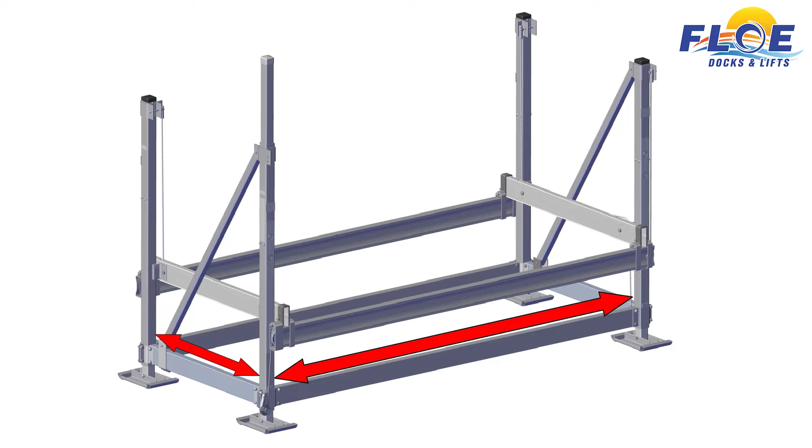Before tightening the fasteners, measure from corner to corner, then the distance between the corner posts above the frame beam and at the top of the corner posts, to ensure that your lift is square. Make sure your lift is level and square before installing the V-braces.

Assemble the cradle clamps with the given nuts and bolts before installing it onto the cradle beam. Use a marker to denote fasteners which have been tightened to the specified torque. In order to do the assembly, you will need the following tools.

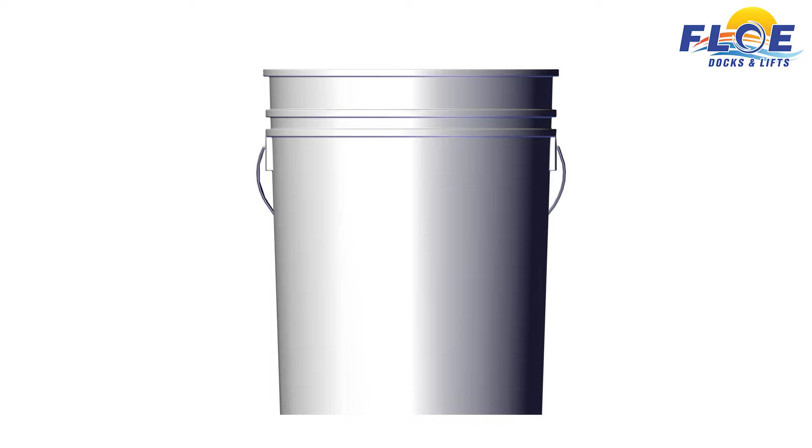The blocking material may be anything 10 to 15 inches in height. We recommend using 5-gallon buckets, jack stands, blocks, or sawhorses. You will need 2 for each side, or 4 in total. The blocking material is used to support the lift during the assembly in step 1 and 2.

Warning: do not use an impact wrench to adjust the easy level legs. Applying too much force to the easy level legs will damage the mechanism. Do not adjust any easy level leg more than 2 inches at one time. Alternate between all legs until your lift is level. If you do not adhere to these recommendations, it may result in poor lift performance and damage to lift components.

Do not use a corded drill to adjust the easy level legs. Use of a corded drill may cause electrocution.

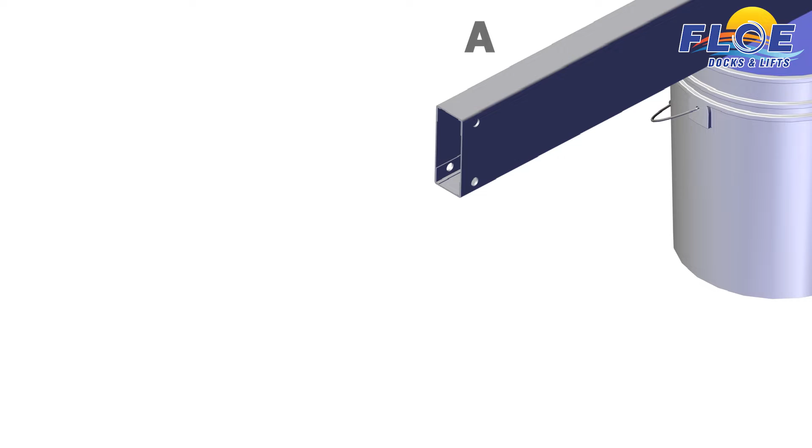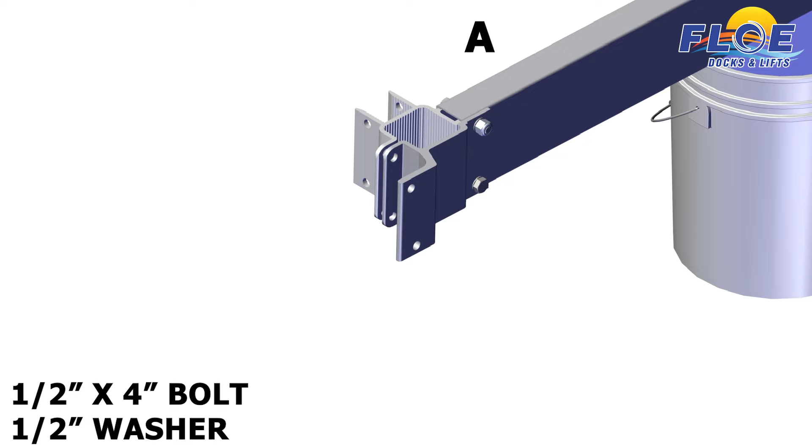Set the 121-inch lift beams onto your blocking material. On corner A, attach the inner frame clamp and the outer sheave frame clamp to the beam using a 1/2 by 3-inch bolt, 2 1/2-inch washers, and a 1/2-inch nylock nut. In the lower hole, attach the clamps using a 1/2 by 4-inch bolt and a 1/2-inch washer. Hand tighten the nuts only. Do not torque until all the nuts and bolts have been installed.

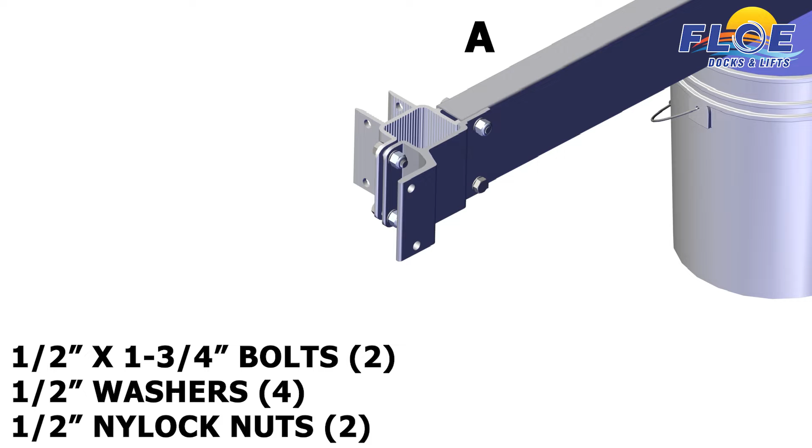Next, attach the inner frame clamp and the outer frame sheave clamp to each other, using 2 1/2 by 1 3/4-inch bolts, 4 1/2-inch washers, and 2 1/2-inch nylock nuts.

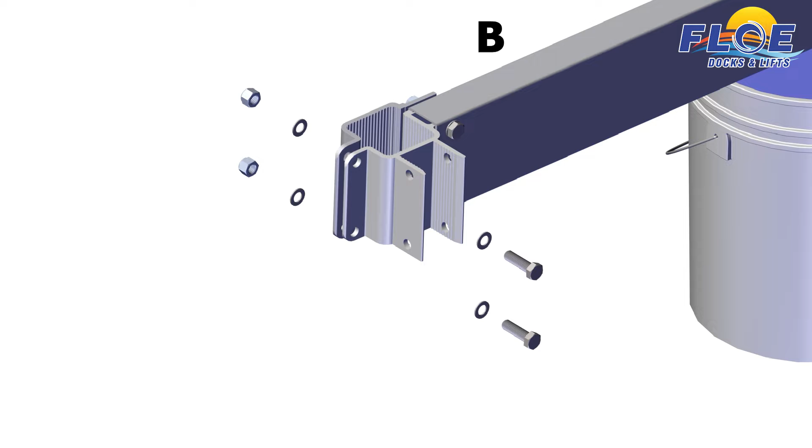On corner B, attach the inner frame clamp and the lower outer frame clamp to the beam, using 2 1/2 by 3-inch bolts, 4 1/2-inch washers, and 2 1/2-inch nylock nuts. Next, attach the inner frame clamp and the lower outer frame clamp to each other, using 2 1/2 by 1 3/4-inch bolts, 4 1/2-inch washers, and 2 1/2-inch nylock nuts.

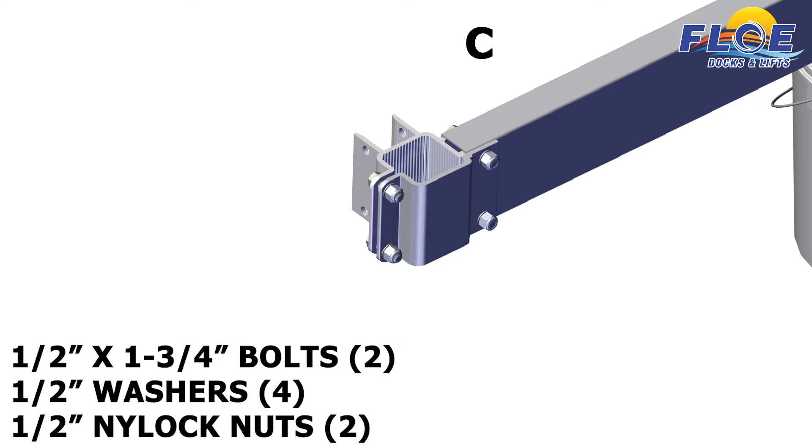On corner C, attach the inner frame clamp and the lower outer frame clamp to the beam, using 2 1/2 by 3-inch bolts, 4 1/2-inch washers, and 2 1/2-inch nylock nuts. Next, attach the inner frame clamp and the lower outer frame clamp to each other, using 2 1/2 by 1 3/4-inch bolts, 4 1/2-inch washers, and 2 1/2-inch nylock nuts.

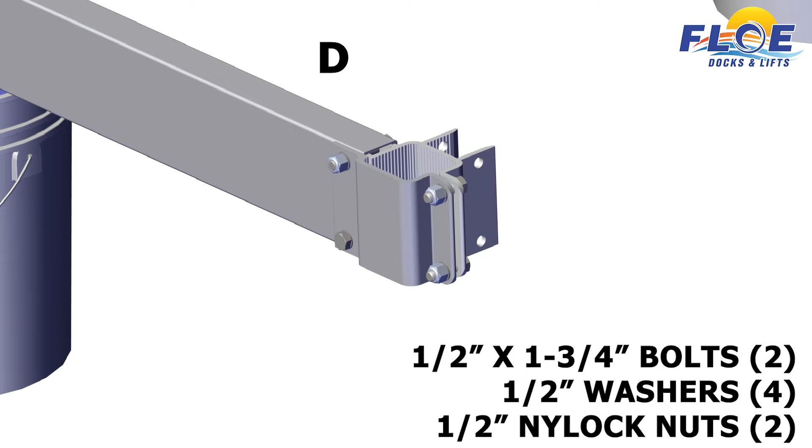On corner D, attach the inner frame clamp and the lower outer frame clamp to the beam, using a 1/2 by 3-inch bolt, 2 1/2-inch washers, and a 1/2-inch nylock nut. In the lower hole, attach the clamps, using a 1/2 by 4-inch bolt and a 1/2-inch washer. Next, attach the inner frame clamp and the lower outer frame clamp to each other, using 2 1/2 by 1 3/4-inch bolts, 4 1/2-inch washers, and 2 1/2-inch nylock nuts.

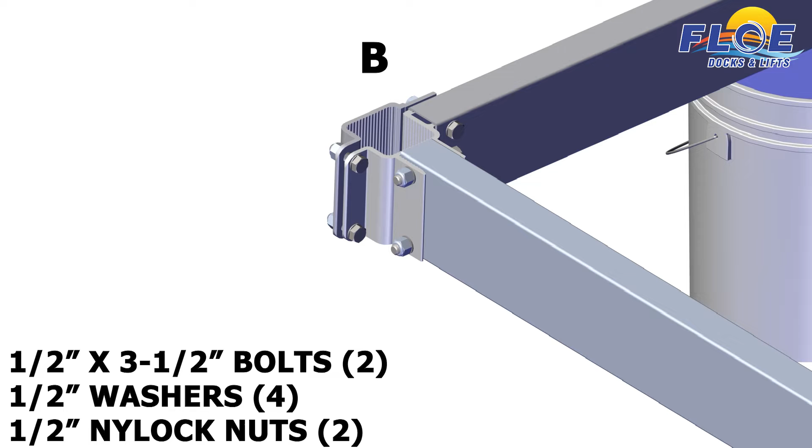Now, attach the 48-inch side frame beams. On corner B, use 2 1/2 by 3 1/2-inch bolts, 4 1/2-inch washers, and 2 1/2-inch nylock nuts. Make sure that the bolt heads are facing towards the inside of the lift, as shown. Repeat this same process on corners C and D.

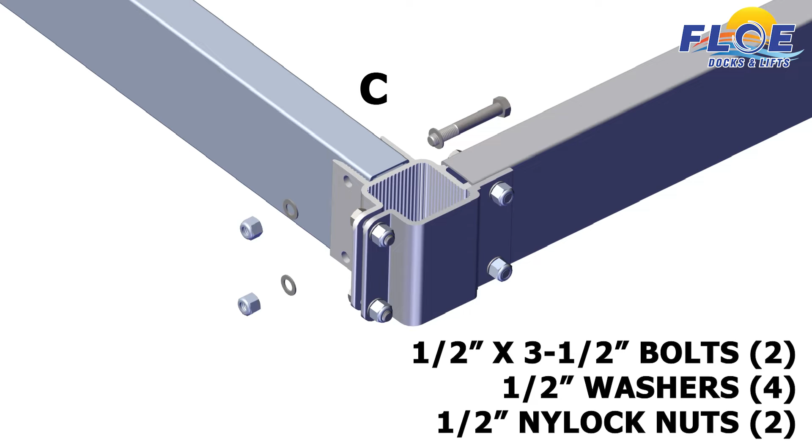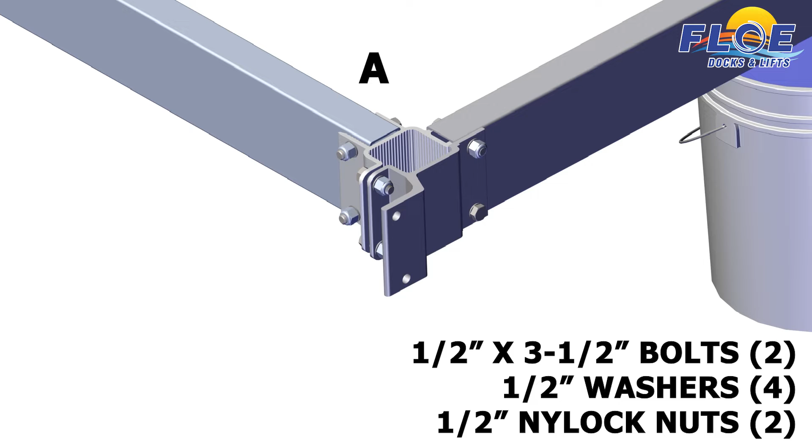On corner A, use two 1/2 by 3 1/2-inch bolts, four 1/2-inch washers, and two 1/2-inch nylock nuts. Make sure that the bolt heads are facing towards the inside of the lift, as shown. The frame beams must be in this orientation before continuing.

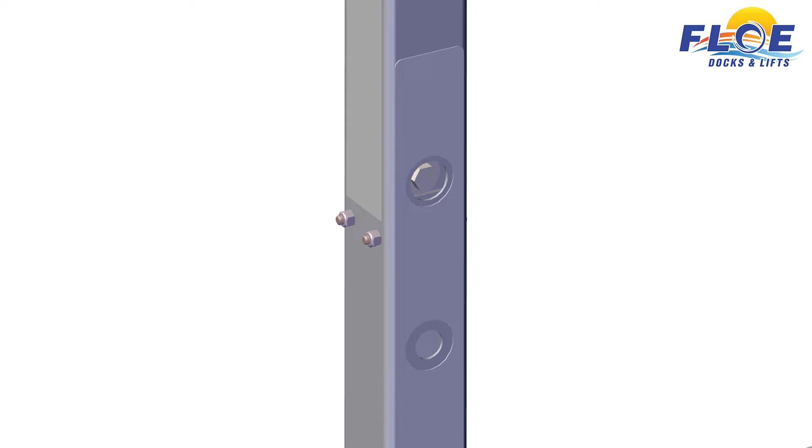Next, locate the corner posts. Slide the corner posts into their corresponding corner. The carriage bolt heads must face the inside of the lift, and the nuts must face the outside of the lift. The water depth stickers and drive bolts must face out on the front and rear of the lift. Make sure to butt the clamp up to the corner post tabs.

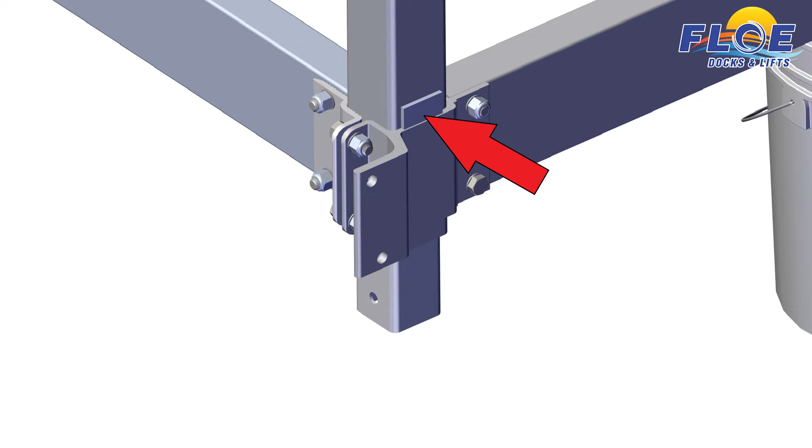Attach the sand pads to the bottom of the posts using a 1/2 inch by 3 3/4 inch bolt and a 1/2 inch nylock nut. Torque to 25 foot-pounds. Use the drive bolts in your drill to adjust the height of the legs. Check to make sure the frame is square before any bolts are torqued.

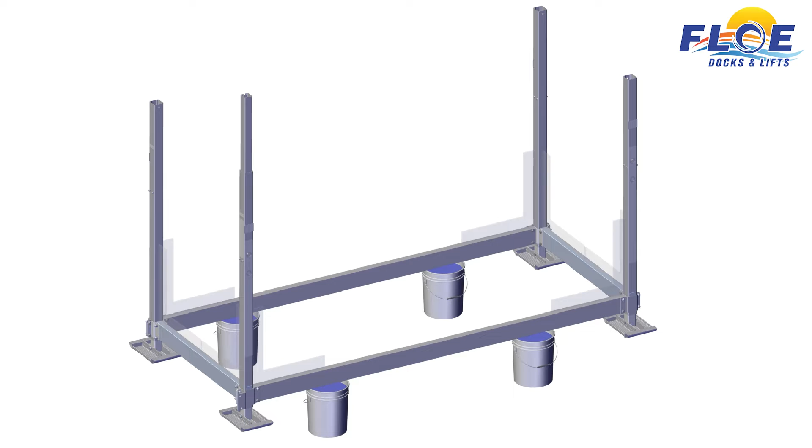The frame beam clamps must be tightened in the proper sequence. If the bolts are not tightened in the correct sequence, the frame beam clamps will be seated poorly. This may result in poor lift performance and damage to lift components.

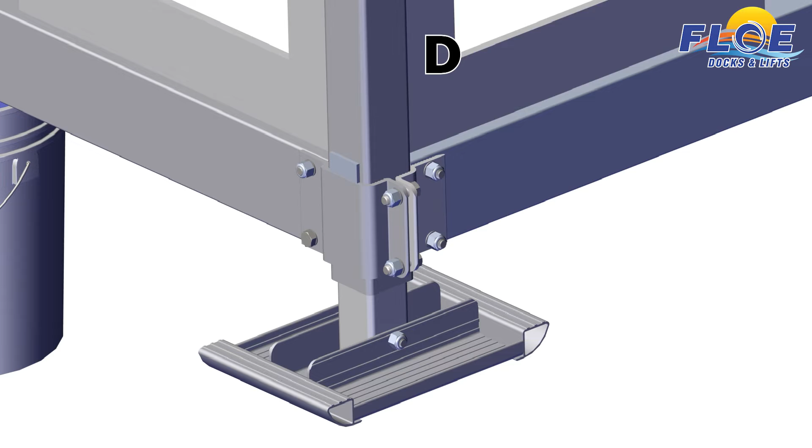Start with corner D. First, make sure that the corner is square. Then, torque the highlighted bolt to 60 foot-pounds. The lower bolt is not torqued until later. Then, torque the highlighted bolts to 45 foot-pounds. Finally, torque the highlighted bolts to 45 foot-pounds.

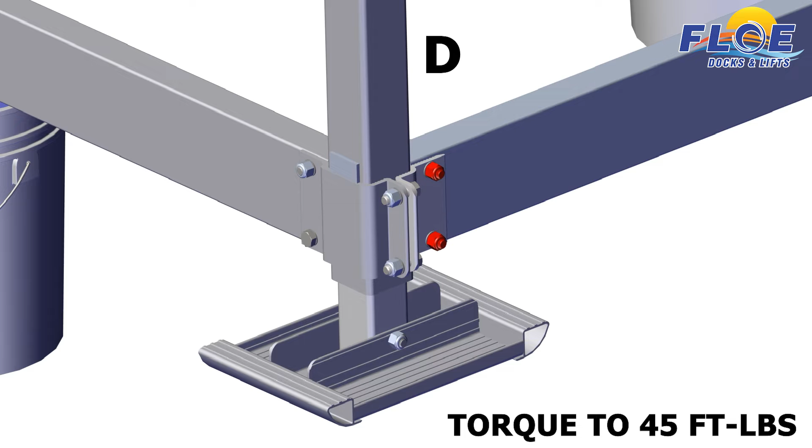Next, move to corner A. First, make sure that the corner is square. Then, torque the highlighted bolt to 60 foot-pounds. The lower bolt is not torqued until later. Then, torque the highlighted bolts to 45 foot-pounds. Finally, torque the highlighted bolts to 45 foot-pounds.

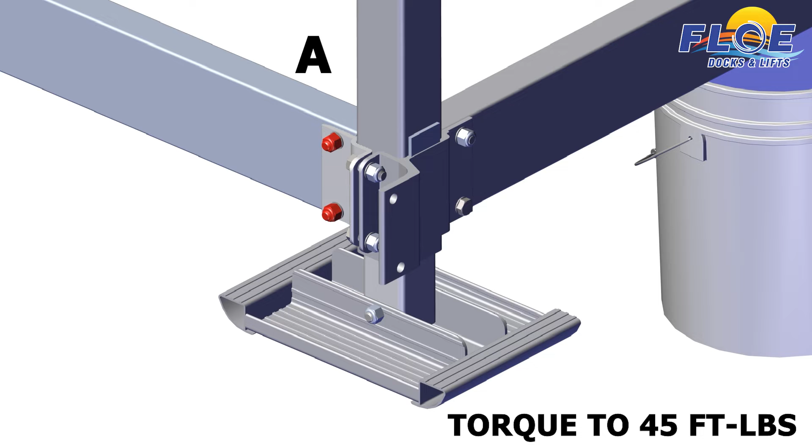Then, move to corner C. First, make sure that the corner is square. Then, torque the highlighted bolts to 60 foot-pounds. Then, torque the highlighted bolts to 45 foot-pounds. Finally, torque the highlighted bolts to 45 foot-pounds.

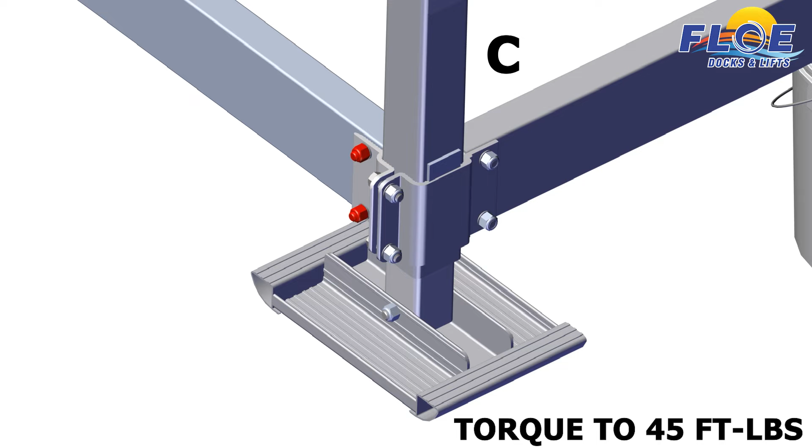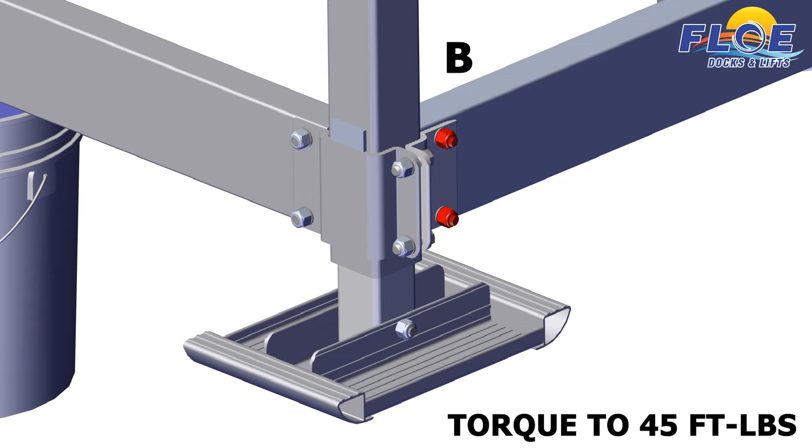Now, move to corner B. First, make sure that the corner is square. Then, torque the highlighted bolts to 60 foot-pounds. Then, torque the highlighted bolts to 45 foot-pounds. Finally, torque the highlighted bolts to 45 foot-pounds. You may now remove the blocking material.

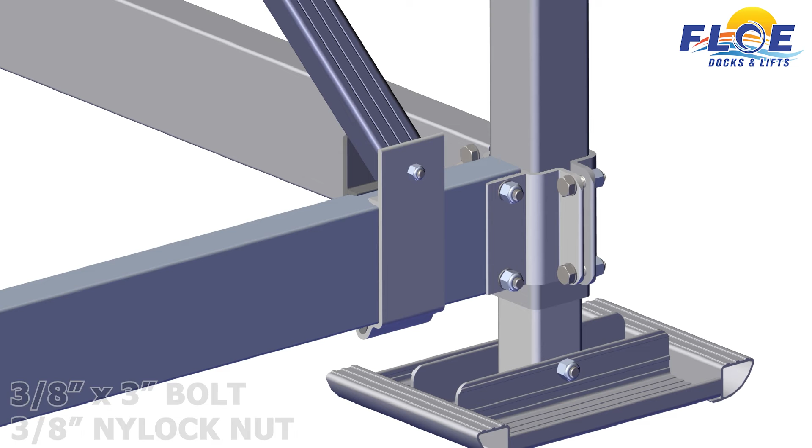Next, slide the V-brace clamps onto the frame between corners C and D. Ensure that the female V-brace clamp is on the inside of the lift. Attach the V-brace to the clamps using a 3/8 by 3 inch bolt and a 3/8 inch nylock nut. Hand tighten only. Do not torque.

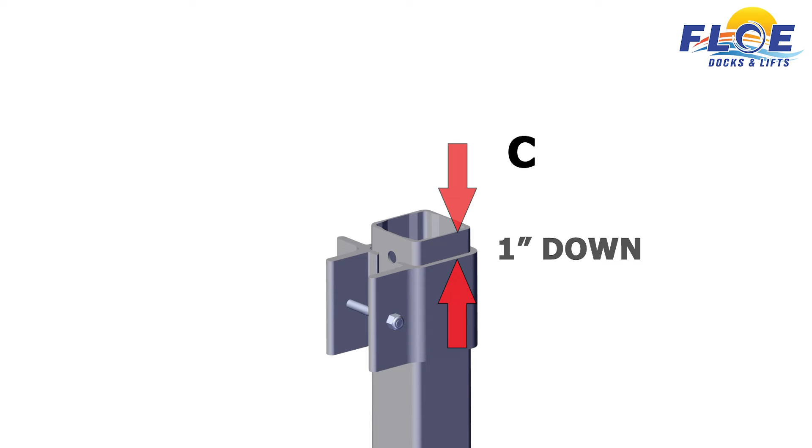Slide the 4-inch upper V-brace bracket onto corner post C. Attach using a 3/8 by 3.5 inch bolt and a 3/8 inch nylock nut. Ensure that the top of the bracket is at least 1 inch down from the top of the corner post. Hand tighten only. Do not torque.

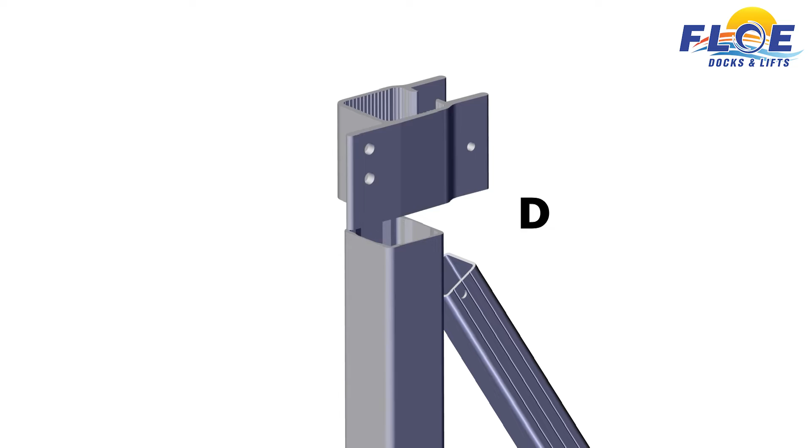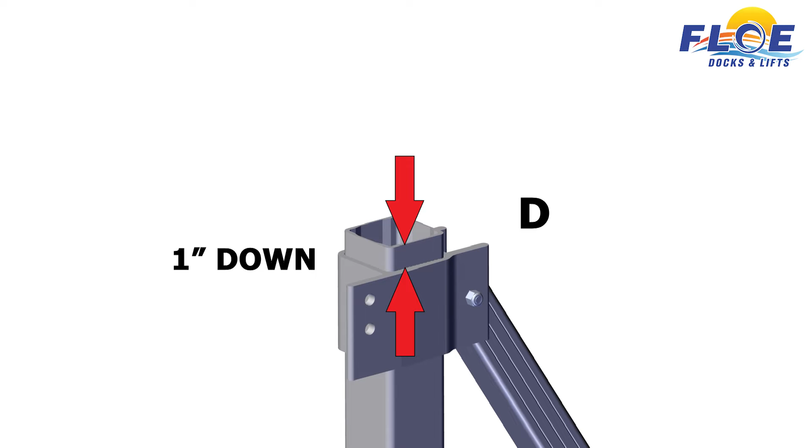Next, slide the upper lifting V-brace bracket onto corner post D. Attach the other end of the V-brace to the bracket using a 3/8 by 3.5 inch bolt and a 3/8 inch nylock nut. Ensure that the top of the bracket is at least 1 inch down from the top of the corner post. Hand tighten only. Do not torque.

Ensure that the corner posts are square. Now you may torque the bolts. First, torque the highlighted bolt to 35 foot-pounds. Now, torque the upper bolts to 35 foot-pounds.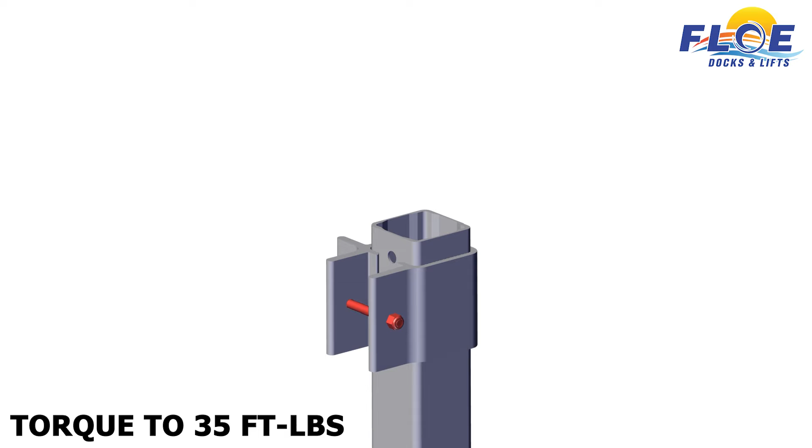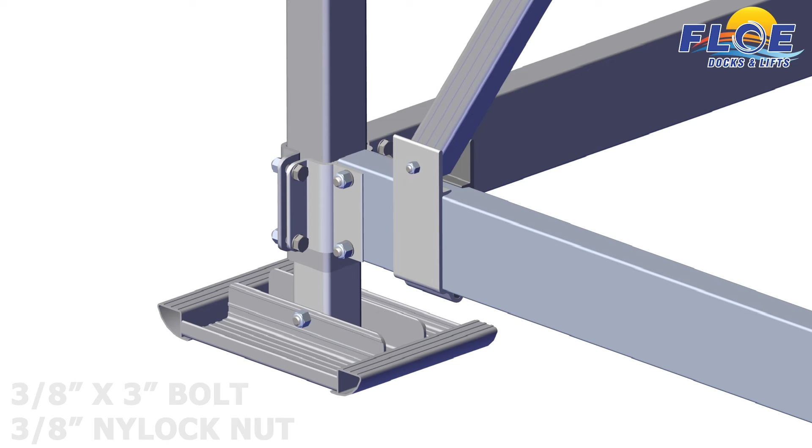Next, slide the V-brace clamps onto the frame between corners A and B. Ensure that the female V-brace clamp is on the inside of the lift. Attach the V-brace to the clamps using a 3/8 by 3 inch bolt and a 3/8 inch nylock nut. Hand tighten only. Do not torque.

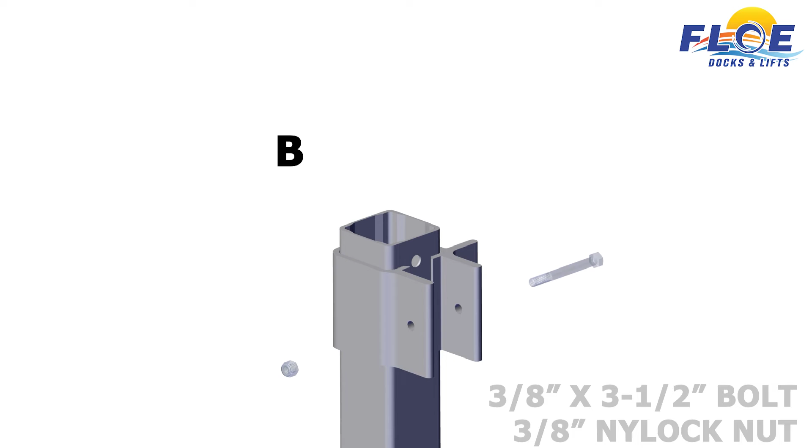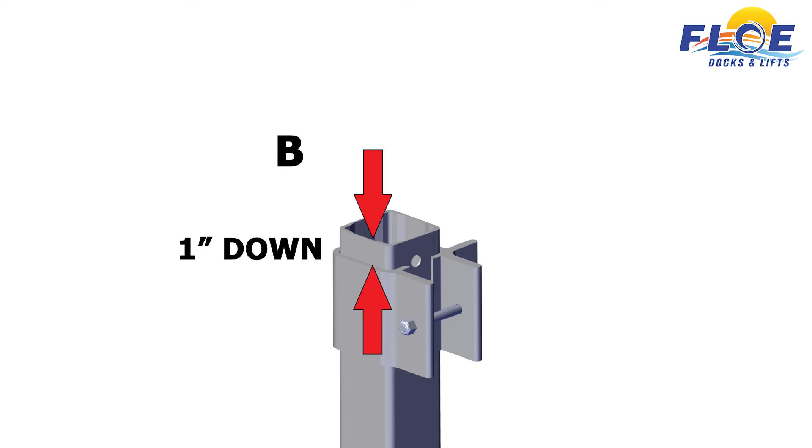Next, slide the 4-inch upper V-brace bracket onto corner post B. Attach using a 3/8 by 3.5 inch bolt and a 3/8 inch nylock nut. Ensure that the top of the bracket is at least 1 inch down from the top of the corner post. Hand tighten only. Do not torque.

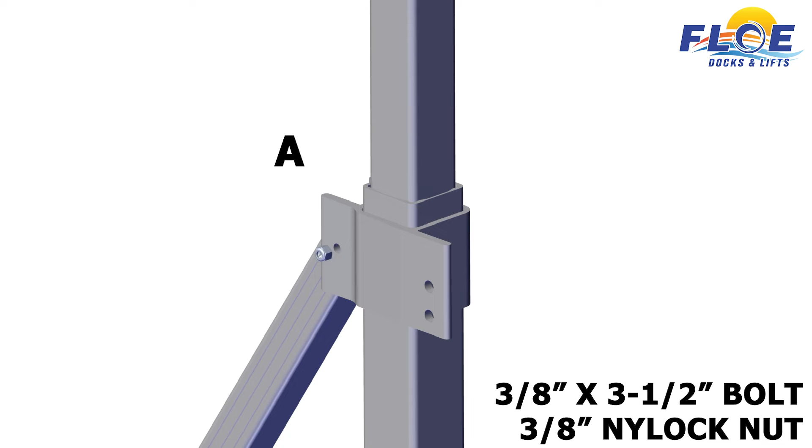Slide the upper lifting V-brace bracket onto corner post A. Attach the other end of the V-brace to the bracket using a 3/8 by 3.5 inch bolt and a 3/8 inch nylock nut. Ensure that the top of the bracket is at least 1 inch down from the top of the corner post. Hand tighten only. Do not torque.

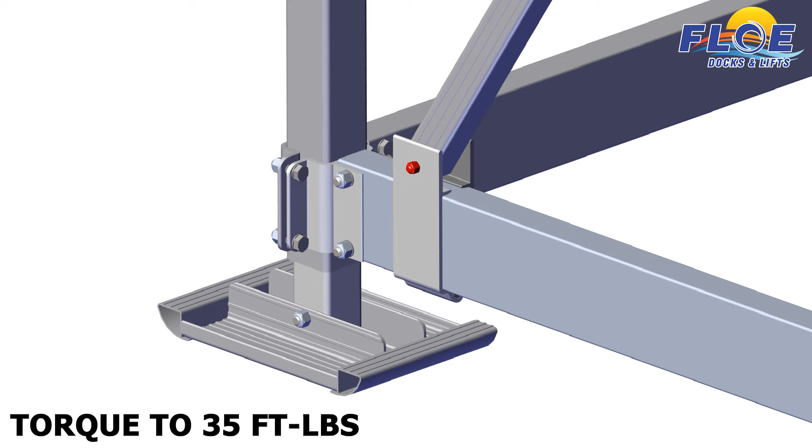Ensure that the corner posts are square. Now you may torque the bolts. First, torque the highlighted bolt to 35 foot-pounds. Now, torque the upper bolt to 35 foot-pounds.

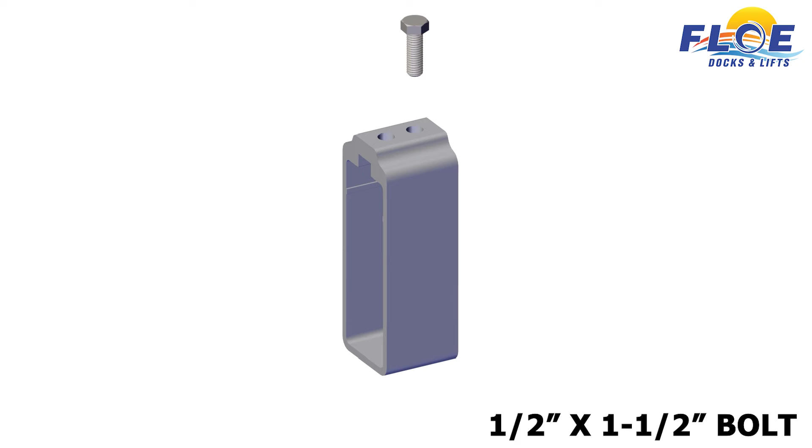Next, locate the cradle lift clamp. Slide a 1/2 inch nut into the cradle clamp. Thread a 1/2 inch by 1.5 inch bolt into the clamp and nut, just until the bolt catches the nut. Do not tighten.

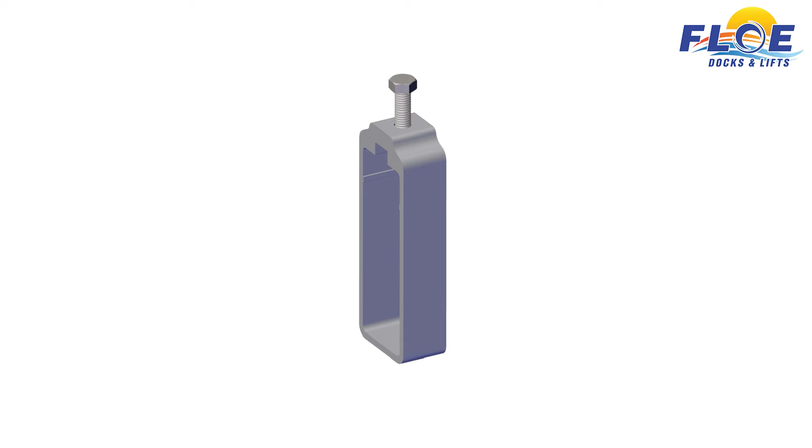On the other 7 cradle clamps, slide a 1/2 inch nut into the cradle clamp. Thread a 1/2 inch by 1.5 inch bolt into the clamp and nut, just until the bolt catches the nut. Do not tighten. Place the right side cradle beam so that it aligns with corner posts A and B.

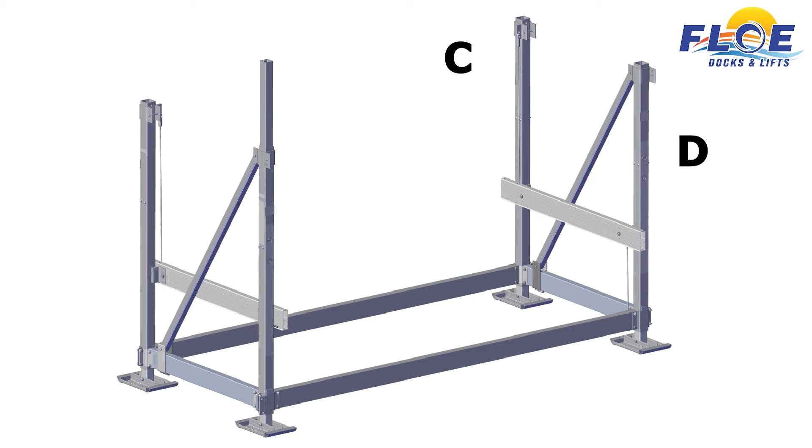The upward leveling cable is placed on corner B, and the downward leveling cable is placed on corner A. Place the left side cradle beam so that it aligns with corner posts C and D. The upward leveling cable is placed on corner C, and the downward leveling cable is placed on corner D.

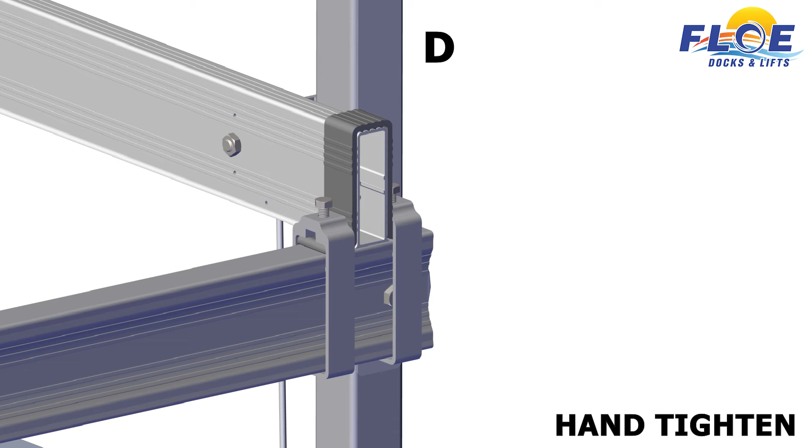On corner D, take the end cradle and slide 2 cradle clamps onto the beam. Then, place the cradle U-clamp on top of the end cradle. Slide the cradle clamps over top of the cradle U-clamp. Hand tighten the bolts to hold everything in place. Do not torque.

On the other side of the cradle beam, corner A, slide 1 cradle clamp onto the beam, followed by the cradle lift clamp. Place the cradle U-clamp on top of the end cradle. Slide the cradle clamp over top of the cradle U-clamp.

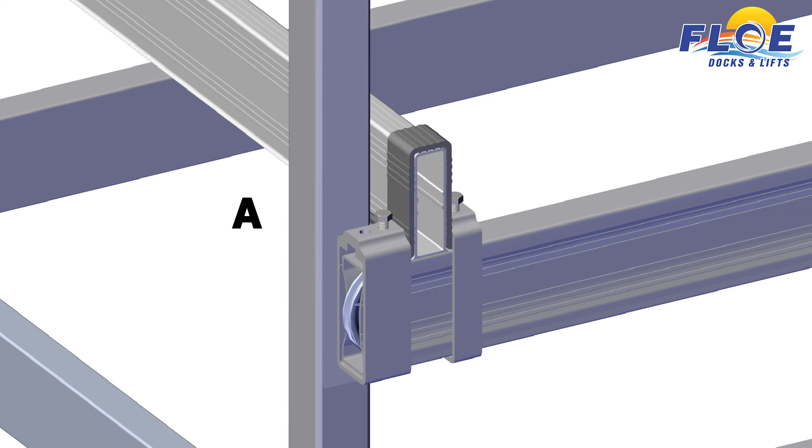On beam B, take the end cradle and slide 2 cradle clamps onto the beam. Place the cradle U-clamp on top of the end cradle. Slide the cradle clamps over top of the cradle U-clamp. Repeat on the other side.

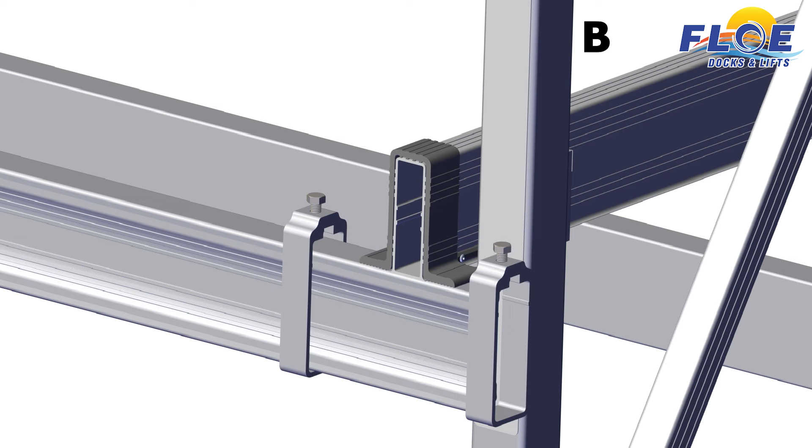Make sure that there is a 1/4 inch gap between the UHMW strip and all of the corner posts. Ensure that the surface of the end cradles is flush with the surface of the U-clamp. On beam B, the cradle clamp should be the same distance from the end on both sides.

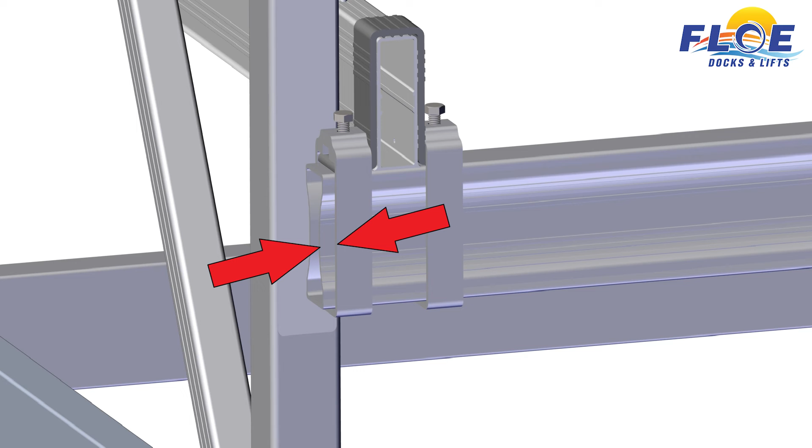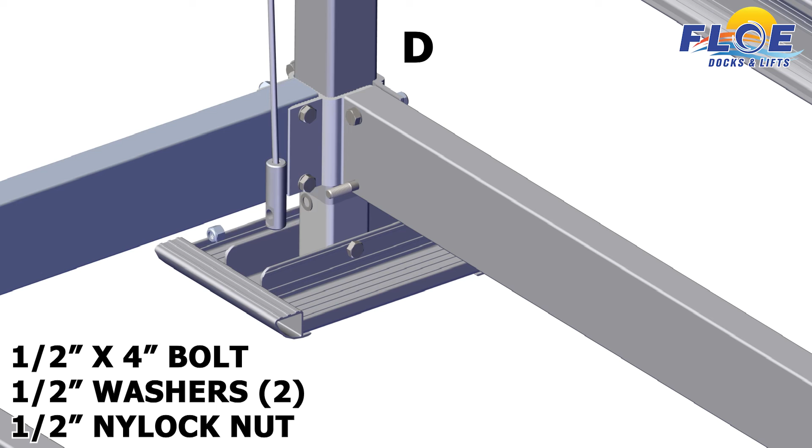On corner D, attach the cable end to the lift frame using a 1/2 by 4 inch bolt, 2 1/2 inch washers, and 1/2 inch nut. From step 1, the bolt and one of the washers should already be installed. Torque to 60 foot-pounds. Repeat this on corner post A.

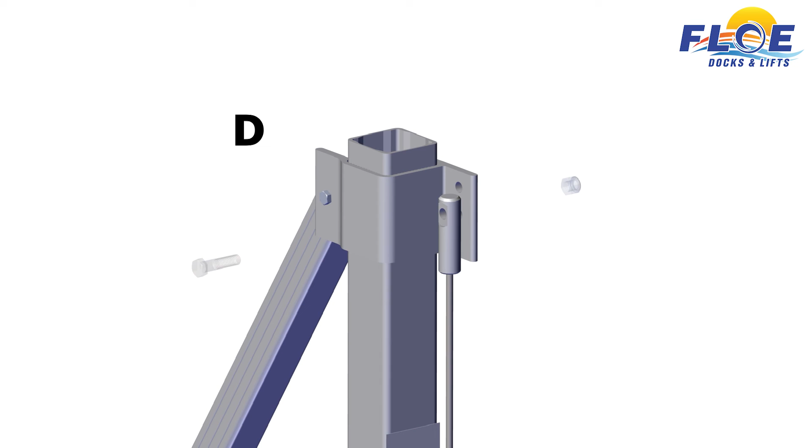Torque to 60 foot-pounds. On corner post D, attach the cable end using a 1/2 by 2 inch bolt and a 1/2 inch nylock nut. Torque the bolt to 45 foot-pounds.

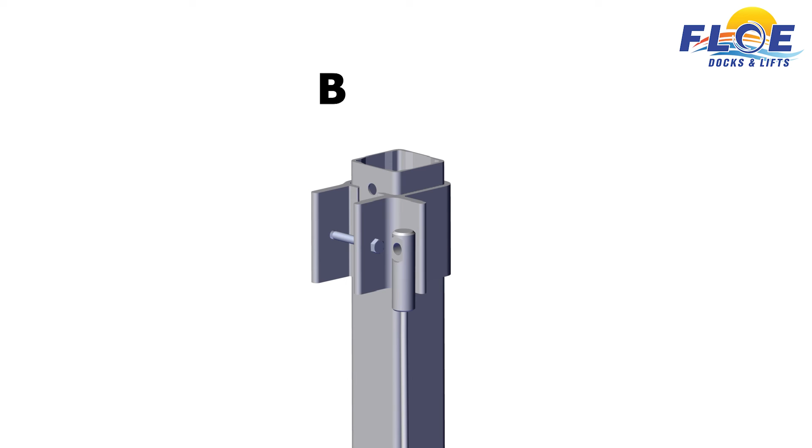On corner B, install the other cable end using a 1/2 by 2 inch bolt and a 1/2 inch nylock nut. Torque to 45 foot-pounds. Repeat this same process on corner post C.

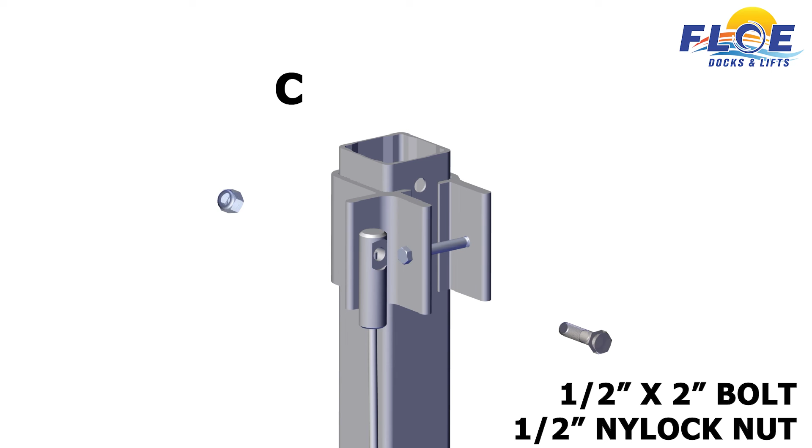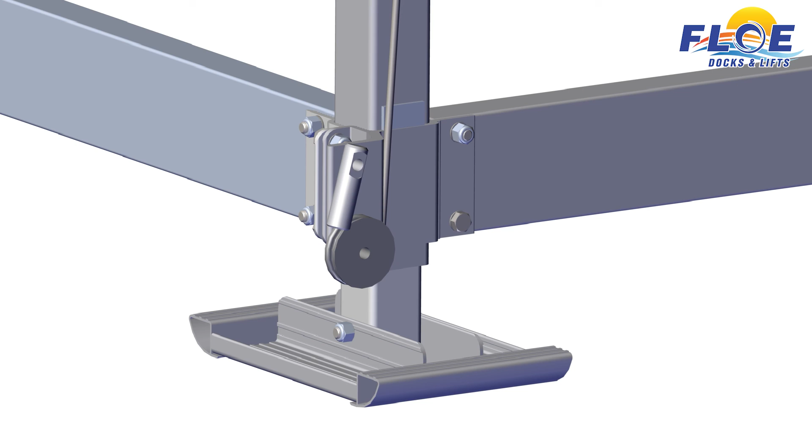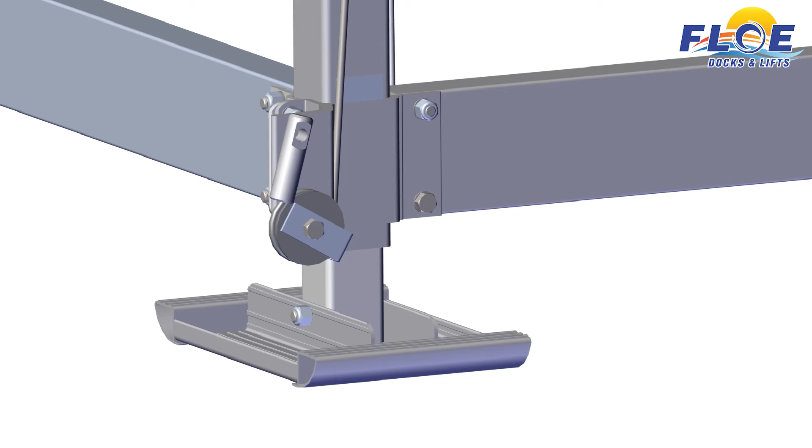Next, you will need to locate the front cable sheave and the cable holder. Wrap the cable around the cable sheave, followed by the cable holder to hold the cable in place. Now, slide on a 1/2 by 2 inch bolt and 1/2 inch nut to hold everything in place. Make sure that the cable holder is installed at 120 degrees, as shown.

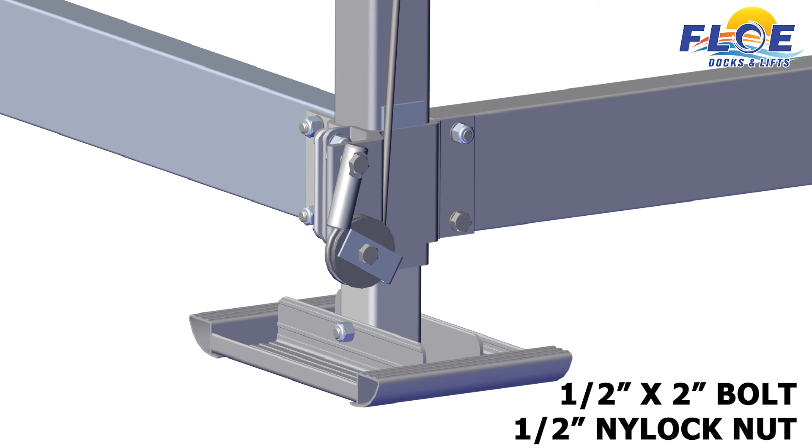Next, take the cable end and secure it in place with a 1/2 by 2 inch bolt and 1/2 inch nut. Torque the nuts to 45 foot-pounds. Ensure that the surface of the cradle beams is flush with the surface of the U-clamps. Now torque the bolts on the cradle clamps and the cradle lift clamp to 45 foot-pounds. Place the caps on the corner posts.

The next step is to add the winch to your lift. Please note that the winch assembly is sold separately. For an instructional video on how to install your manual or electric winch, please go to FLOEinternational.com.

Your boat lift is now assembled.